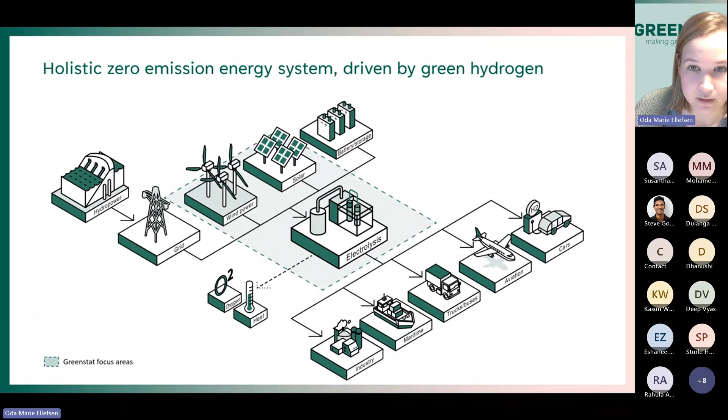We have a large portfolio of projects in different stages. I wanted to highlight some of our flagship projects in Norway that focus primarily on hydrogen for maritime transport. So together, these 3 projects in Glomfjord, Rørvik, and Kristiansand will produce almost 9 million kilos of green hydrogen every year to supply ferries, container vessels, bulk cargo ships, and aquaculture workboats with zero emission fuel. And this will start in 2025.

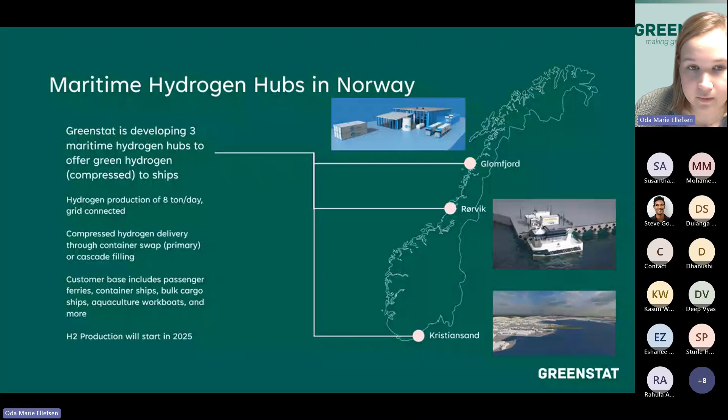So we can't really discuss hydrogen without delving into some interesting theory. I believe there are some scientists in the audience, so I hope you're all familiar with the periodic table. Hydrogen is located at the top left, and it's the smallest, the lightest, and most abundant element in the world. So it's the first element in the periodic table and has been assigned atomic number 1. And in its electron shell, there is 1 electron.

And that means it would like to have 2. And to do that, it will essentially bond with almost any other element on the periodic table and itself, which is why we usually find hydrogen gas as H2. It will bond with carbon to form different hydrocarbons. It will bond with oxygen to form water. It will bond with nitrogen to form ammonia. And that's the way we find most of hydrogen on Earth.

So hydrogen as a gas will burn in air with a faint blue flame. It's very hard to see in daylight, but if you turn down the lights, it will have a faint blue flame, and it burns to form water. It's flammable at around 4% volume in air, and that's why we have to handle it correctly and with safety precautions.

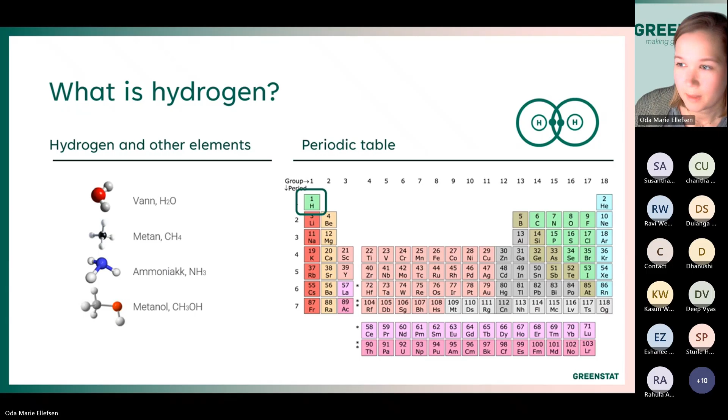So I'm sure if you've ever heard of hydrogen recently, you've heard about the different colors. And there are many different colors for describing ways of producing hydrogen. Like, it's a colorless gas, but we use color to differentiate between the way we produce the hydrogen. So green, blue, and gray are the main types of hydrogen production that we work on.

Gray hydrogen is produced through natural gas reformation, and in this process, we always have CO2 emissions, about 9 kilos of CO2 for every kilo of hydrogen produced. It's the primary method for producing hydrogen today. About 96% of the world's hydrogen production is through SMR, as it's called, so steam methane reforming.

Now, the way some companies are working now to reduce the impact, the emissions from steam methane reforming, is through carbon capture. And then we call the hydrogen blue. So we capture the CO2 that's produced in the process and store it or use it for other purposes. And that yields a lower carbon emission hydrogen that can be used for sustainable purposes.

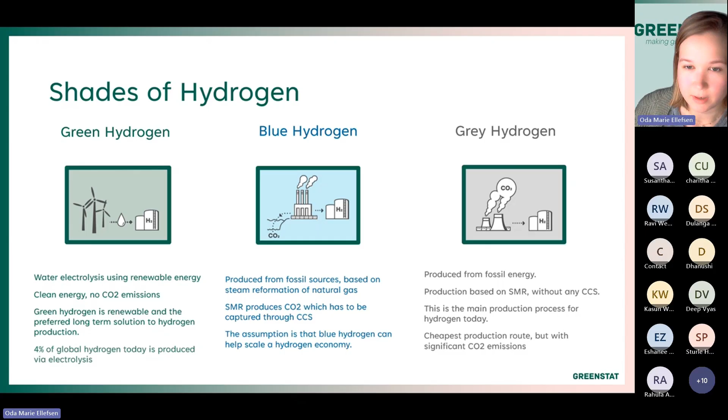Before I do that, it's important when we talk about hydrogen to know we refer to it as an energy carrier, not as an energy source. An energy source is basically a form of energy that exists in nature and hasn't undergone any transformation. Unfortunately, the direct utilization of these energy sources is quite challenging, and we have to go through some conversion process. So sunlight is an example, or uranium is an example. Coal, oil, and natural gas can also be characterized as energy sources.

An energy carrier is produced from an energy source and stores energy that can be used later or at a different location. Batteries are an example of this, but so are hydrogen and ammonia that we'll talk about today. So, green hydrogen and electrolysis.

The most important components in this are the electrolyzer and the fuel cell. So in water electrolysis, you split H2O, so water, into hydrogen and oxygen using an electrical current. So we are converting electrical energy into chemical energy in the form of hydrogen. So without going too deep into the theory, in principle, it's quite simple.

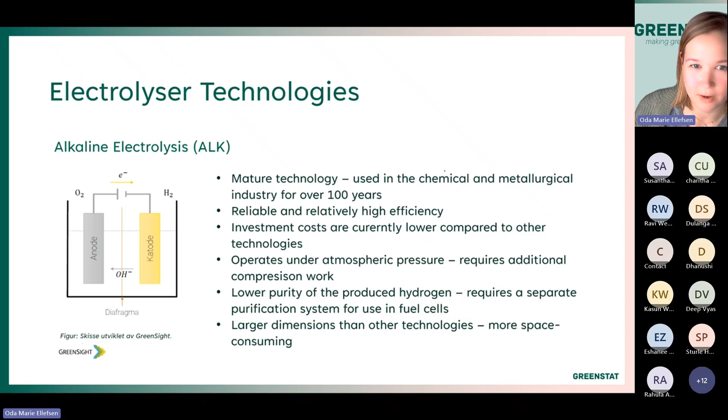An alternative, which is a twist on the alkaline electrolyzer, is pressurized alkaline electrolysis. It's very similar to the alkaline electrolyzer, except that it operates at 25 to 35 bar, which helps us reduce the downstream compression work.

It has the same efficiency as an alkaline electrolyzer, but it's also a little bit more responsive. So it will operate easier in systems where you have fluctuating energy supply, such as if you were to connect it to a solar system or a wind turbine. Other than that, it's pretty similar to alkaline.

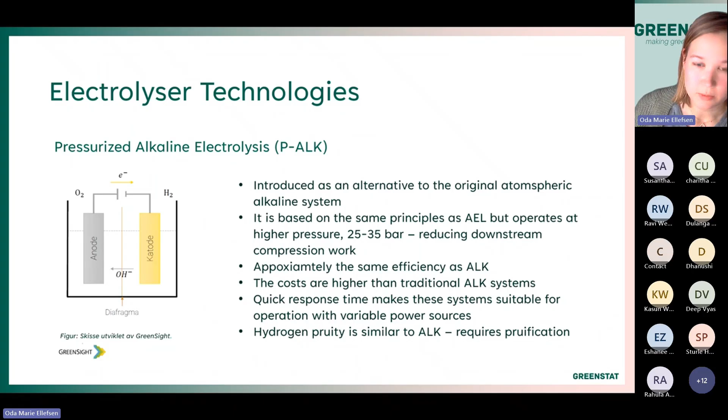Now, the proton exchange membrane electrolyzer, or PEM, is a newer evolution of the hydrogen electrolyzer technology. It's different in that it transports the protons, so H+ ions, through a membrane, which is the proton exchange membrane. It's a polymer, basically, that allows the protons to go through.

And it operates at a higher pressure, so 15 to 30 bar, again reducing the downstream compression work. And it's very suitable for variable inputs of renewable energy. However, it does use iridium and platinum as catalysts generally, which is why the capex, or the investment cost for this type of system, is higher.

And currently, we expect shorter lifespans of the PEM electrolyzer compared to an alkaline system due to the membrane degrading over time. And finally, it's a lot more compact than alkaline electrolyzers due to higher current density. So it's smaller and easier to put in a tight space, to put it that way.

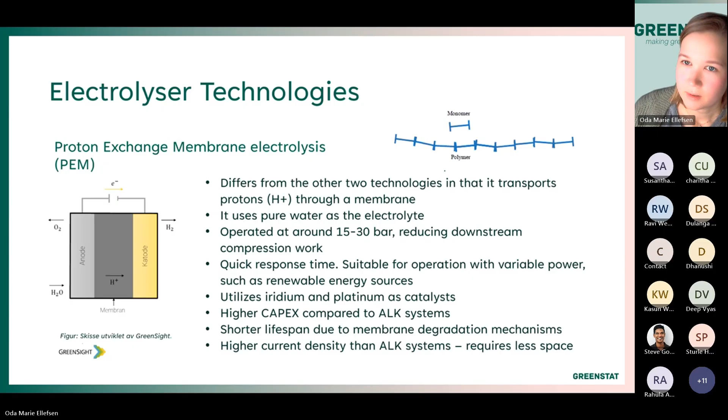So, energy chains and value chain and energy density. I want to mention this. It's important, when you're designing a solution to convert a fossil system to a renewable system, to think about the energy value chain, which is the path that energy takes from primary source to an energy form that we can use for practical purposes.

So what I would like for us to be aware of is that at each step in the value chain where the energy is transferred, the energy quality is also reduced, and it's crucial to understand that operating with a short energy value chain, if possible, is very wise. So if we can avoid any step in this process or shorten the chain, we have a more efficient system.

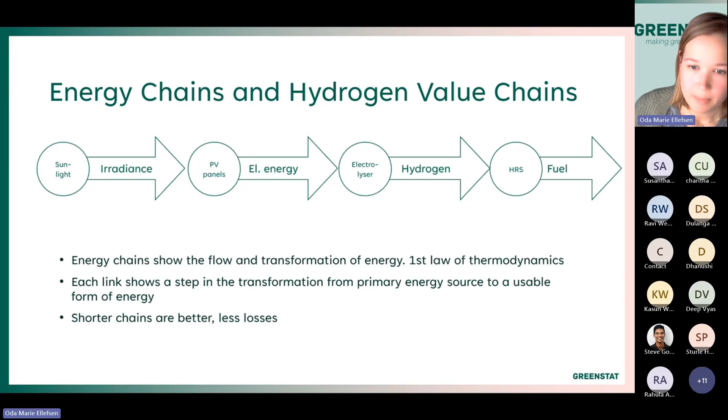So here we have the energy value chains for compressed hydrogen and liquid hydrogen, just to showcase the difference between the two. In both cases, we have the production of the hydrogen. But to produce compressed hydrogen, we just have a compression step. We might have a transport step, which does use some energy. We store it, which doesn't expend any energy. And then we have the refueling.

If we were to use liquid hydrogen, we'd have the production and the liquefaction, which is very energy intensive as well. The transport and the storage, we have the issue of boil off during storage and transport, where the liquid hydrogen basically boils and you lose some hydrogen in the process. And you have to regasify the liquid hydrogen to use it in a fuel cell. So that's also an energy expenditure.

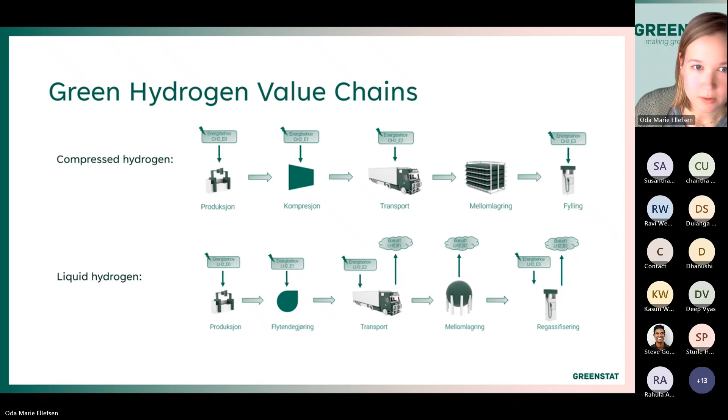So that's just an illustration. I hope that's relatively clear.

Moving on to energy density, and I'll be discussing storage a little bit later. But I want to show this figure for volumetric versus gravimetric energy density. So that's the energy per volume or per kilogram.

And you can see hydrogen, either liquid or compressed, in the bottom right corner of the figure. And as you can see, the hydrogen has very high gravimetric energy density compared to most of the other substances. So it's providing a lot of energy for its weight.

However, hydrogen is a gas. It has a very low volumetric energy density compared to the other substances here. So it's very important to keep in mind, both for transportation and storage. And it's also why it might be advantageous to produce green ammonia or other carriers from the green hydrogen that we produce.

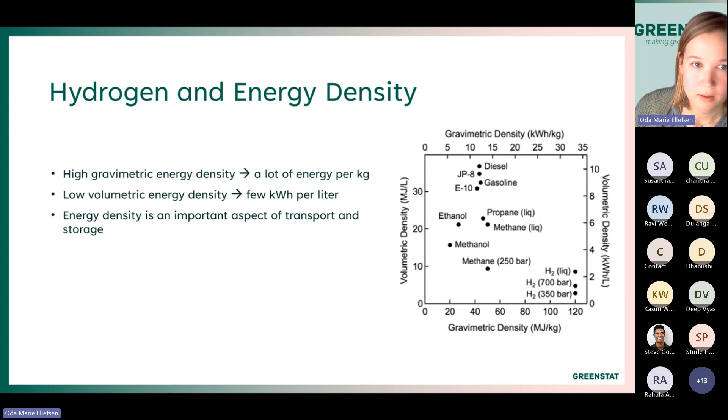And another way to illustrate this, here we have 60,000 kilowatt hours represented in marine diesel oil, the volume that we require of marine diesel oil, ammonia, compressed hydrogen, and as batteries, essentially. And each box is 1 cubic meter. So as you can see, compressed hydrogen would require about 180 cubic meters of storage versus 18 for marine diesel oil if you were to use it on a ship.

So again, you can carry less volume of, or carry less hydrogen for a given volume than you can with fossil fuels. And when you look at the alternatives such as batteries, you have to consider that you probably can't carry all of the energy you require in a battery, depending on the application.

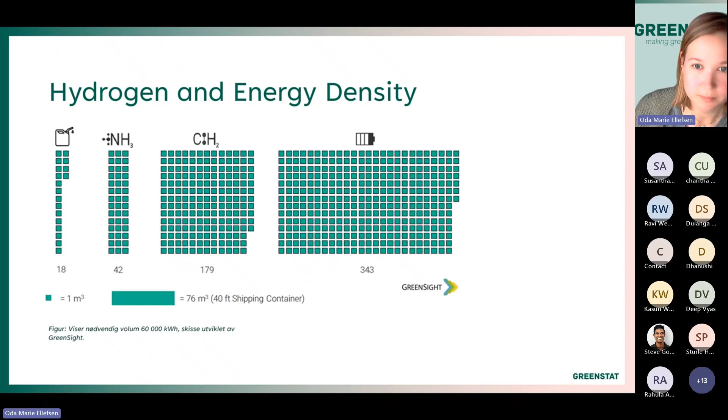So I mentioned green ammonia. There's a lot of talk about this in Norway, and I think also all around the world. And to understand why we talk about green ammonia, it's, I think, good to understand the Haber-Bosch process.

It's an industrial process to produce ammonia from nitrogen and hydrogen. So if the hydrogen is coming from green hydrogen, so renewable hydrogen, the produced ammonia is green as well. And it's named after the two scientists who developed it, Fritz Haber and Carl Bosch, two Germans with interesting history. But the Haber-Bosch process essentially involves mixing nitrogen from the air and hydrogen in a reactor, which operates at relatively high pressure and temperature, about 200 atmospheres and 450 degrees Celsius. The catalyst used is iron, which helps lower the activation energy for the reaction and increase the reaction rates.

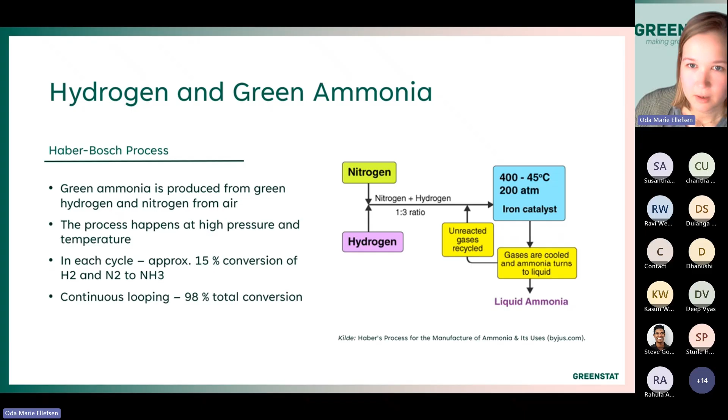So we try to differentiate between the use cases for hydrogen, ammonia, and methanol to some extent versus batteries. And the way we tend to see things fall down is that batteries are used for short and small light vehicles. So personal EVs is an example. We have many of those in Norway. They're becoming more and more common in other parts of the world, and as small pleasure crafts at sea.

Whereas hydrogen will be used when the application and the energy demand is higher. So that's for long haul trucking. It's for buses, ferries, workboats, and some smaller ships. And ammonia, methanol, those types of energy carriers will be used for really long distance shipping, deep sea shipping, and for carrying large amounts of energy in a sustainable way.

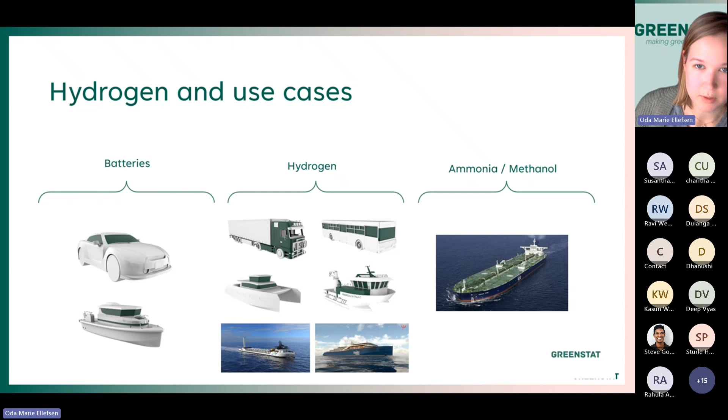So to look at the different types of storage solutions that exist, I'm not going to go through all of them, but just give you an overview. We have the compressed form of hydrogen, which is the simplest and most common. We have liquid form of hydrogen, and we have the different types of chemical storage solutions.

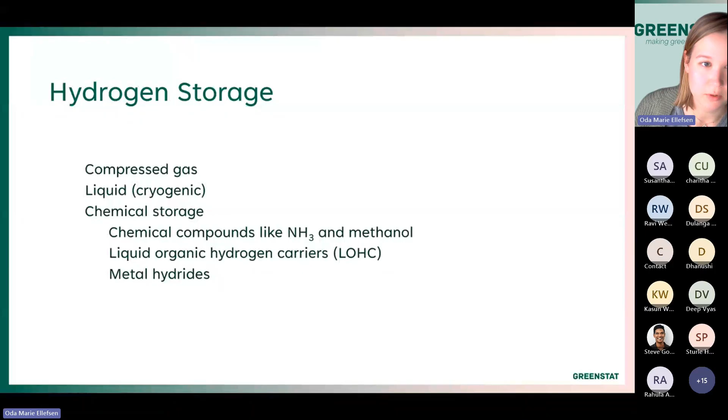Compressed hydrogen is stored in tanks made of either steel or composite materials. Both types of tanks must withstand very high pressures, generally about 350 bars, but some go even higher, 700 bars for passenger vehicles. So weight can be a very important parameter in this context.

As a rule of thumb, traditional steel tanks consist of about 80 kilos of steel per kilo of hydrogen, while composite tanks are lighter and consist of approximately 22 kilos of composite materials per kilo of hydrogen. These tanks often have a plastic liner as the inner layer to prevent corrosion.

Generally the composite tanks are made from carbon fiber, but there are some companies who develop glass fiber as an alternative. It's slightly heavier, but it's also cheaper, which is why it's starting to be used more in hydrogen storage.

Liquid hydrogen can be suitable for storing large amounts of hydrogen. These storage tanks are highly insulated with vacuum insulation. They have an inner and outer tank, and they require some quite sophisticated materials. The hydrogen has to be contained at minus 253 degrees Celsius, which is extremely cold, to be liquid.

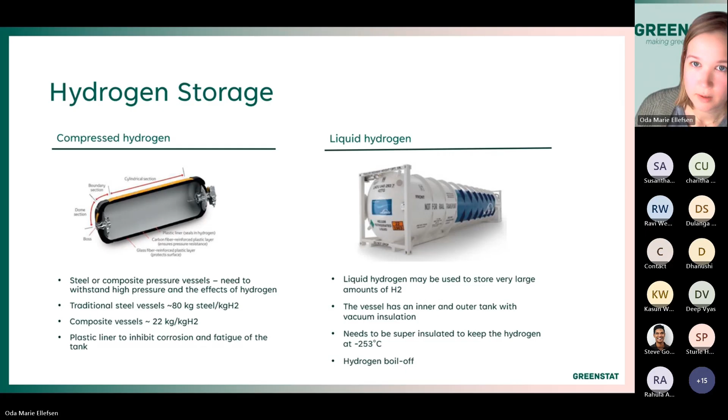Now, ammonia and methanol are considered chemical carriers of hydrogen, and they have to be converted back into pure hydrogen generally if they are to be used in a fuel cell. They can also be used directly in some internal combustion engines. A company called Wärtsilä is exploring the conversion of, or basically retrofitting, existing internal combustion engines to use a blend of ammonia and marine or maritime diesel in the engine.

So the advantage is both ammonia and methanol are liquid at atmospheric pressure and relatively manageable temperatures. So they are very common industrial chemicals. However, they are toxic, both of them, and ammonia is also very corrosive. So that needs to be designed for when considering these alternatives.

Another one I want to mention is called liquid organic hydrogen carriers. It's not very well known yet, but it's another method for storing hydrogen in essentially organic oil. This oil has an affinity for hydrogen and can be loaded with the hydrogen produced through electrolysis. Then you can transport the oil, the LOHC, to the end user, which can be a vessel or any other hydrogen use.

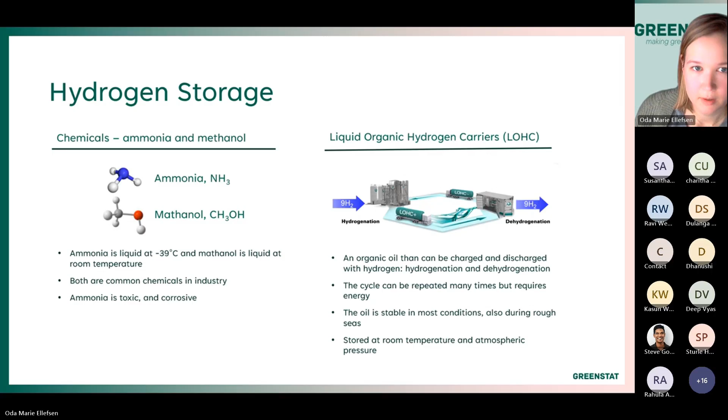Hydrogen and use cases. As mentioned, hydrogen's role in the energy transition is to be a clean and environmentally friendly alternative to fossil fuels. It can replace fossil fuels in some industrial processes, but it can also be used as a fuel in the transport sector.

Potential applications include heavy-duty transport, buses, some construction equipment, and also normal passenger cars, though there are some limitations on using it for normal EVs. Railways is an alternative where normal electrification isn't feasible. And some people are also considering using hydrogen for airplanes.

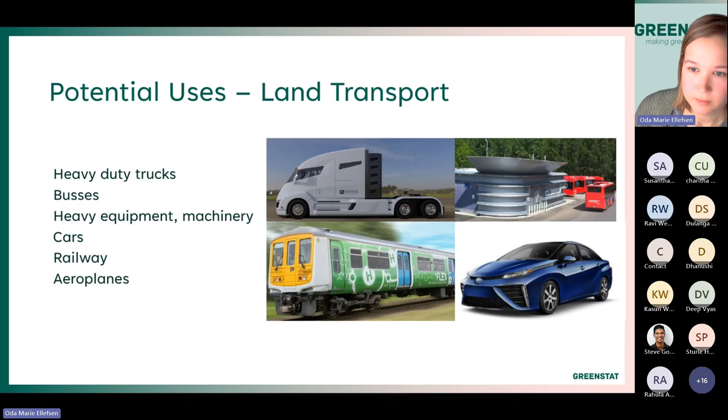Just to clarify, a hydrogen car, truck, or bus is essentially an EV where a battery is combined with a fuel cell and a hydrogen tank. So the hydrogen works as a range extender to the battery EV, and it's not used in an internal combustion engine. It's used in a fuel cell to drive the electric motor, and the same goes for ships.

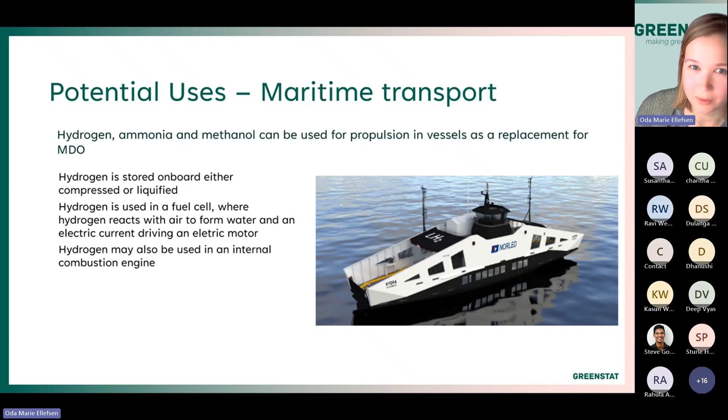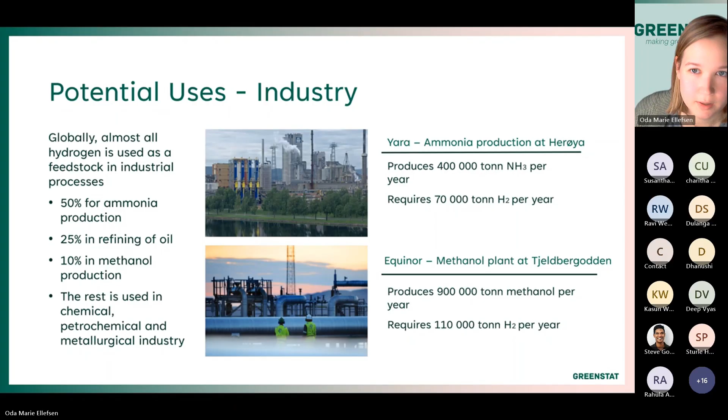Finally, just to mention a little bit about the byproducts. During electrolysis, we generate obviously hydrogen, but we also generate oxygen, and finally also some heat because of the inefficiencies in the system. So the oxygen and the heat represent essentially byproducts from electrolysis that we can use for other purposes. The idea here is, in each of our projects, we try to think of ways to use these byproducts, both because they can improve the financials of the project, but also because it's a reasonable way to increase the overall system efficiency. If we use all this energy to produce only hydrogen, then some of that energy is basically lost, whereas if we utilize the heat and the oxygen, we can get a much higher use of our input energy.

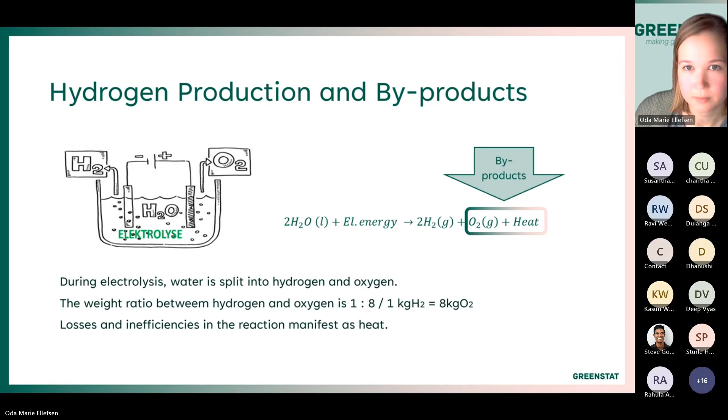This is the idea behind industrial symbiosis. We try to create collaboration between other businesses nearby, and we try, for instance, to sell the heat to district heating systems or for greenhouse heating. In Norway it's quite cold most of the year, so it makes sense. The oxygen can be used in land-based aquaculture, which is a big industry in Norway, and it can be used as a direct input in industries that require oxygen, such as some chemical industries. This is something we work a lot with in our projects to try and realize the best possible energy efficiency of the overall system.

Like I mentioned, the energy chains that we talked about earlier. So I think that's my last slide. I think I talked for quite a while. I hope there are some questions as well.